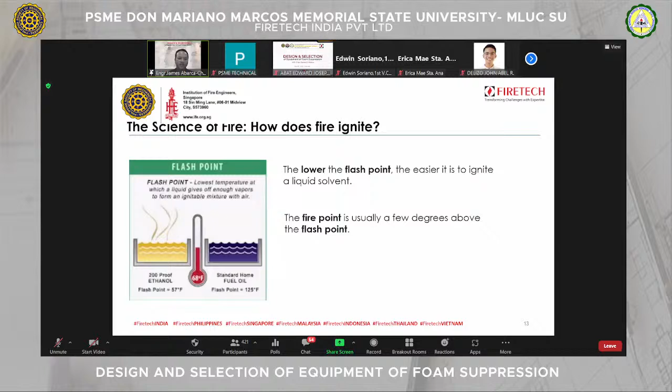Then we discuss flammable liquids. What are these flammable liquids? Hydrocarbons. You know, basic hydrocarbons are basically the same as fossil fuels. The common hydrocarbons are methane, ethane - you remember your chemistry from college, right? - propane, butane, pentane, and hexane.

These are hydrocarbons, and you can see where they're found. I tried to research this - there are top 10 petroleum companies in the Philippines. So once you graduate, you can work here.

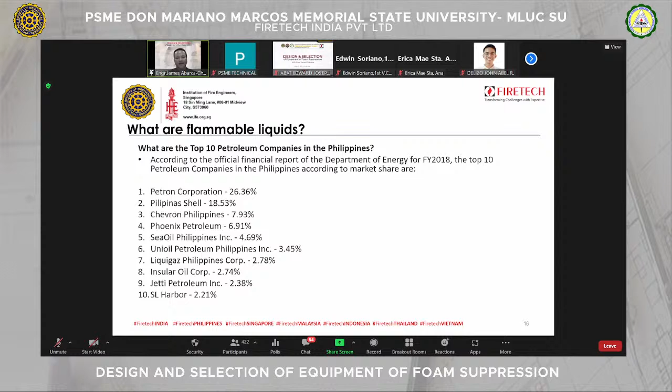Just master foam suppression and you can apply as one of their engineers. Petron, Shell, SeaOil, Phoenix, Liquigas, Insular, Jetti, and SL Harbor - these are the top petroleum companies with hydrocarbon fuel storage tanks in the Philippines that use foam suppression.

Polar solvents should also be liquid. Polar solvents dissolve other substances with a polar protic molecular structure.

Examples are acetic acid and methanol, which are used in subsectors of the chemical industry like basic chemicals, chemical products, pharmaceuticals, soap, detergent, and paints.

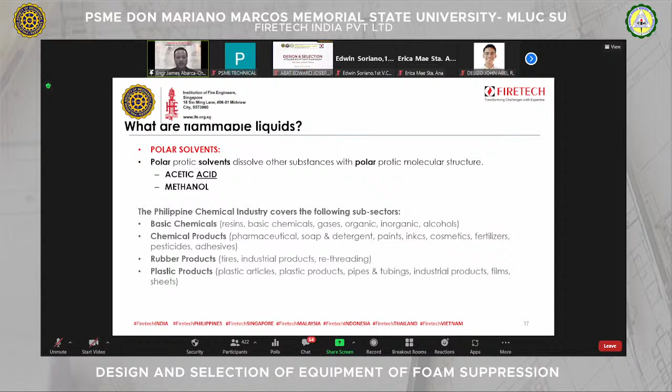And in the Philippines, they have what they call SPIK, the Samahan sa Pilipinas ng mga Industriyang Kimika. Their associations include the Philippine Association of Paint Manufacturers, Philippine Plastic Industry Association, Philippine Oleochemical Manufacturers Association, Progressive Association of Printing Ink Manufacturers, and Association of Petrochemical Manufacturers of the Philippines.

So with this, you can see the idea of what your future application, field, or job target will be, as long as you learn and master the design, selection, and installation of foam suppression systems. So from what I mentioned earlier, that's where you can go and you're welcome there.

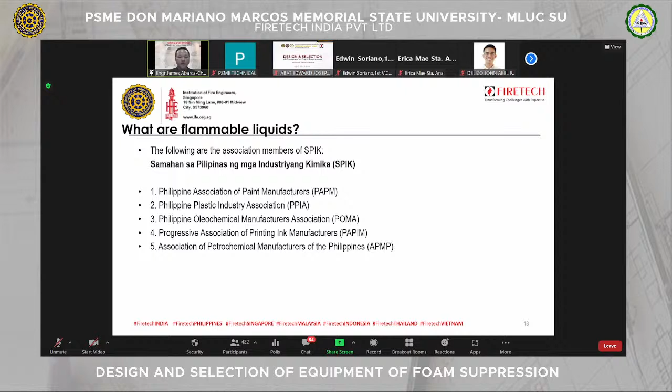Now we also learn about types of foam. We have protein foam, fluoroprotein foam, and the latest one always used now is AR-AFFF, because it's a combination of synthetic stabilizer foaming agents, fluorochemicals, and synthetic polymers designed for use with polar solvents.

The chemical makeup of this foam prevents the chemical solvents from destroying them. So this is today's modern foam.

And when we studied and compared all the types of foam concentrate, so far AR-AFFF is the most beneficial in terms of properties - knockdown, heat resistance, fuel tolerance, vapor suppression, and alcohol resistance. It's excellent in alcohol tolerance.

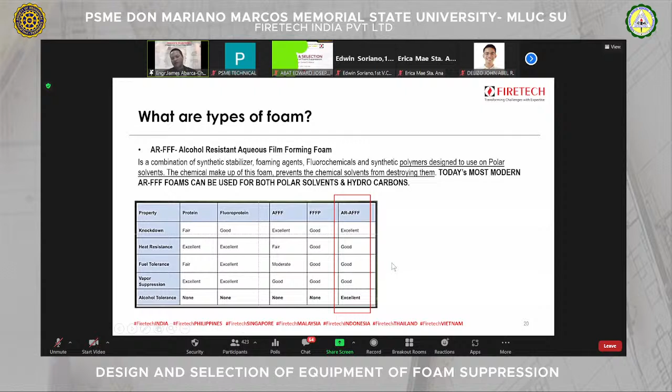So it's very much applicable to polar solvents and hydrocarbons at the same time. This figure shows that AR-AFFF is really good quality and recommended for foam suppression, because when applied to polar solvents, the solvent will destroy your foam blanket if you use other foams. But AR-AFFF will resist.

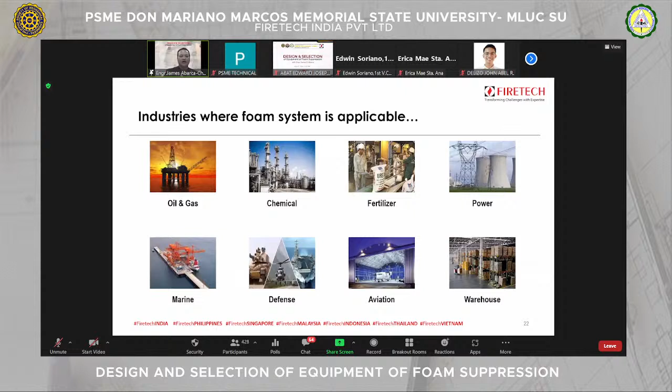Now for the products, according to code, foam suppression must always be UL listed. You saw last time how I showed you an equipment being listed.

Every 3 years, our company reports to UL staff the results of our sample foam concentrate to show that the quality is still the same as what was tested before. Otherwise, we will retest it. So it's important that it's UL listed.

You always have to tell your client that they don't need to cut costs by getting a foam concentrate made in someone's backyard in another country. I have experience with this right here in the Philippines - they tried to use that, and in the end they had double expenses because it wasn't actually foamy.

Okay, that foam concentrate - they ended up buying another one. So it should always be a UL listed product.

Now let's move on. We have two topics for design today. First topic is we're going to design and select the foam suppression equipment for a loading bay. Do you know what a loading bay is? Let me discuss what a loading bay is.

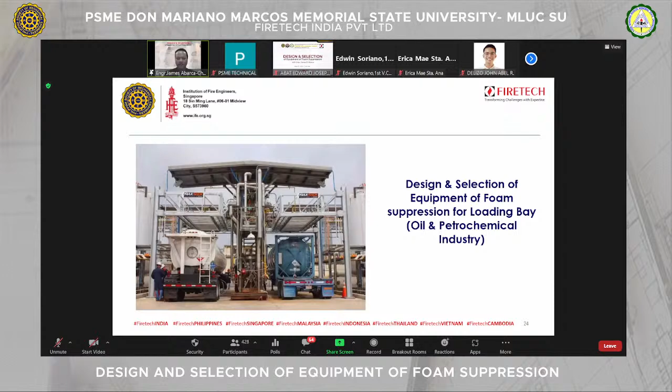Before that, let me show you a video so you get a better view. What is a loading bay? This is mostly seen in petrochemical industries - the hydrocarbon hazards I mentioned earlier. Companies like Petron and Shell have facilities like this. Okay, let's watch for a while.

Oh wait. Sorry, I have to unshare because I need to share the sound. Okay, wait. The sound wasn't shared. Okay, there.

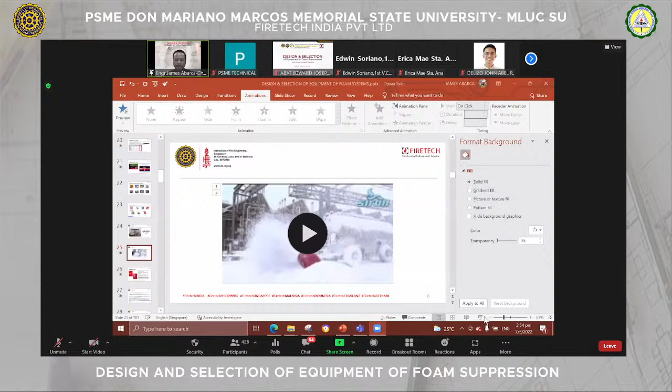Okay, so here's the video.

Okay. So, nakita niyo doon, that's a loading and unloading bay.

Okay, that's a loading and unloading bay. If you notice, there's a nozzle on top and there are also foam monitors on the side. So why is it designed that way?

I will tell you later. Tell me if I'm going too fast. Anyway, we have 4 hours, so I'll take my time so you can understand better.

In designing a foam suppression system, particularly for the loading bay, NFPA 16 and 11 are used. I hope you are familiar and aware of what NFPA is - the National Fire Protection Association of the US.

The loading and unloading of flammable combustible liquid is one of the most hazardous operations to be undertaken at any manufacturing or storage facility of hydrocarbons or polar solvents. To lessen the risk to lives and property, a quality fixed foam fire protection is needed - I'll explain what that quality fixed foam fire protection means.

Or a dry chemical is often used - that dry chemical is another topic, which I can also discuss in detail in a future technical webinar or mentorship, as long as you become active in the fire protection of PSME Technical Division.

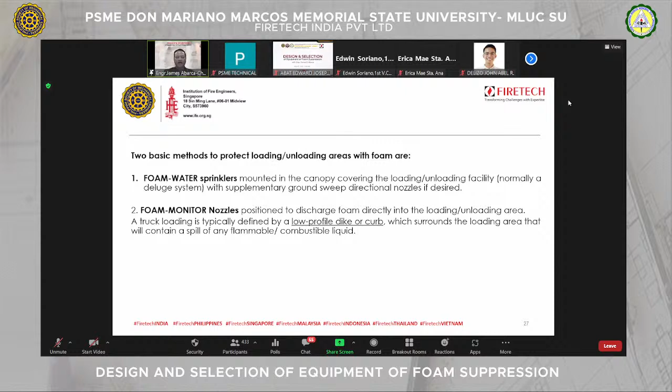And then a truck loading is typically defined by a low profile dike or curb - in Tagalog, maybe like a small perimeter wall - which surrounds the loading area that will contain a spill. So if there's a spill, this small perimeter wall accommodates it where the truck is parked.

And in many instances, tank trucks have aluminum storage tanks, and having a spill fire start underneath could cause the aluminum tank shell to weaken. The nozzles are designed to discharge foam underneath the truck to give a rapid knockdown of any fire.

Normally, 2 nozzles are used per loading and unloading bay - I'll show the positioning later. One nozzle should be located near the rear wheels of the tractor, and the other located at the rear wheels of the trailer. Both nozzles should be directed to discharge under the trailer area.

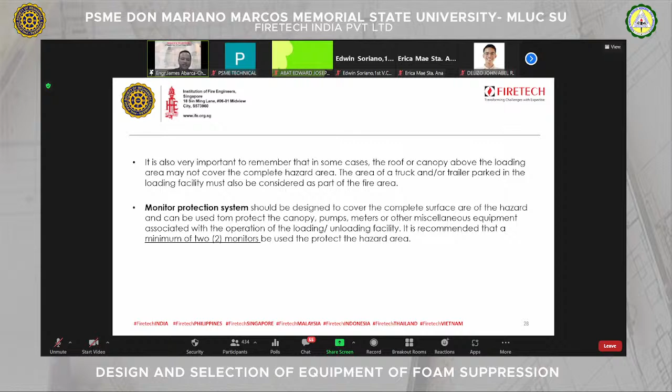Kasi yung nozzle nasa taas lang. Pag nag-discharge directly going down, what about may sunog sa left and right or other area of the truck? So yun yung gamit ni monitor, foam monitor. Okay, kasi pwede yang ilipat ang focus o ilipat ang target, ng foam monitor. Okay.

So, well, that one, I leave it to you as a research, please. I cannot explain everything today. Okay? Ano ba ang intrinsically safe detectors?

So, now, once na-detect na yan, magkakaroon na ng flow. It's either an open nozzle dito sa may canopy o kaya sprinkler head na nag-burst. Okay, but in this case, it's an open head, kaya nga may heat detector doon na nagbigay ng signal sa deluge valve. Eventually, there is a flow of foam here hanggang sa the pressure will be reduced. Yung water supply will increase kasi nag-umandar na yung pump. And it will push the water into the tank shell and the foam concentrate inside the tank.

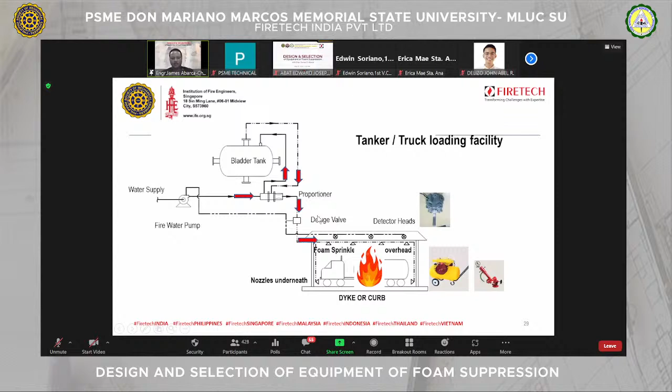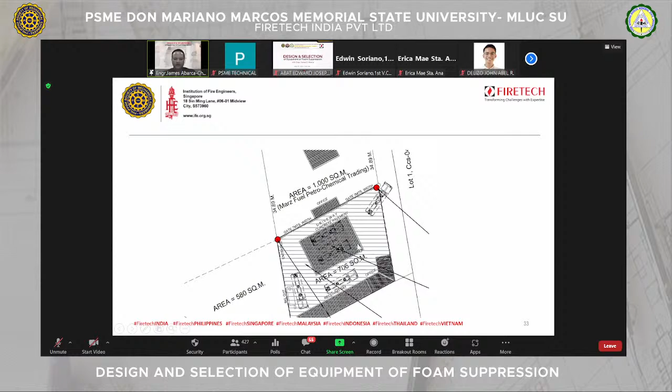Okay? Here's inside the canopy. Now let's design for that. So this is the canopy and this is the foam monitor being placed at the perimeter. Ang given ay, ang type of fuel daw na nandun ay hydrocarbon na gasoline or diesel. Ang dimension ng bay ay 10 by 2 by 7 ang height. Okay, 10 by 2 by 7 ang height.

And the requirement is to select and size up the foam suppression equipment. So they wanted to put 2 mobile foam monitors around the perimeter as explained in the code. Kailangan na merong foam monitor and foam sprinkler heads at the canopy and underneath near the tires. So to make the design very simple, better make an Excel sheet.

Doon sa Excel sheet, ganito ang magiging itsura. So ito yung area protected. Ano yung flammable liquid. Then I have 2 bays, right? It mentioned here. And the curb area is 40 kasi 10 by 2, right? Length width, 10 by 2 is 20, dalawa.

So 40. Okay? So if I were to look at this chart, yan, ang mga color blue ay mga given, no? Yun yung given, yun yung mismong sa planta. Si application rate, kukunin natin kay NFPA 16. Papakita ko kasi inyo mamaya. And then, dito sa other chart is yung application rate, again, we will take from the NFPA 16. So, from this constant, ito naman yung mga constant na magbe-base tayo kay NFPA 11.

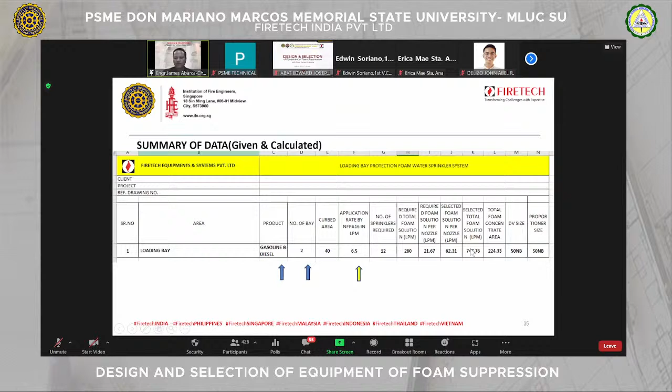So hydrocarbon. So ito yung aking mga guide, yung mga sinulatan ko. Ika-calculate natin itong foam solution rate, kung ilang unit ang foam, ito yung aking mobile foam, and ano yung size ng aking bladder tank. Same thing doon sa chart na isa mamaya. We can compute for this foam solution, and later on we can size for the foam bladder tank at yung size ng deluge valve at saka yung proportioner. Okay, so let's go.

Before we move forward to the design, kailangan meron na tayong na-download or hawak-hawak sa desktop natin yung mga data sheets ng ating gagamitin.

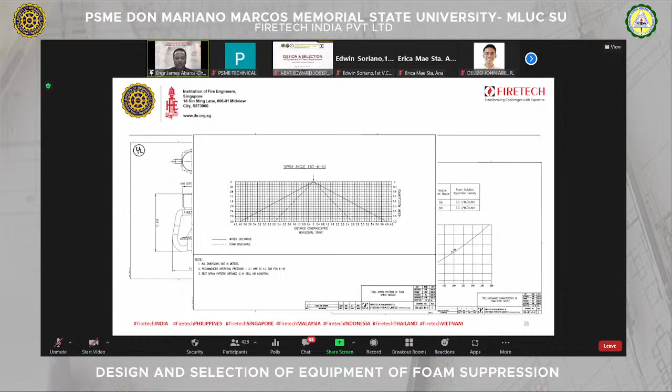Okay, so now I also have downloaded my foam monitor. So I use a watercam foam monitor with this technical data sheet. Andito yung model, importante dito si flow, ito ang very important dito, kailangan itong isa-take note natin. Of course, I use this mobile foam with a flow of 225 liter per minute.

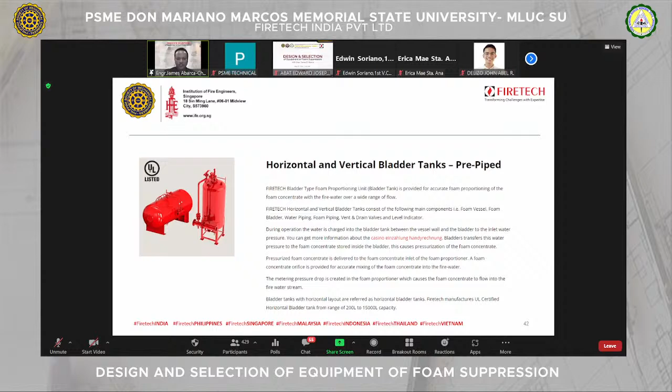Now, for my bladder tank, I use this data sheet, with the range of, I use vertical bladder tank with the range ng capacity mula 200 hanggang 2,000. So nakahanda na yung aking data sheet, nakapark muna yan.

Now, what's the methodology? Number one, identify the fuel to be protected, so in this case hydrocarbon. Number two, make sure that you already have available data sheet, nagkaroon na tayo, pinakita ko kanina.

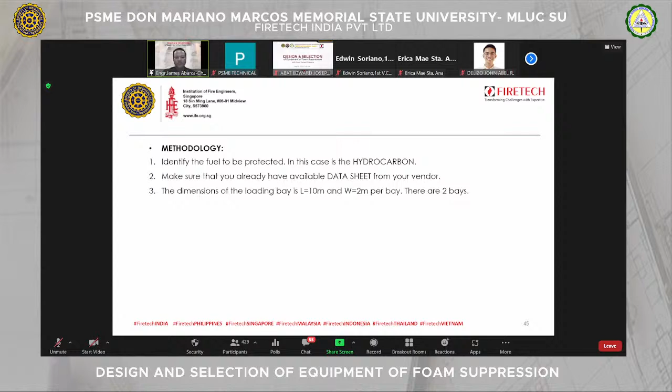Number three, the dimensions of the loading bay is 10 meter length and width 2 meter per bay, and there are 2 bays, so yun yung ating protected area, yung dalawang bay. The application rate to be used is 6.5, as per NFPA 16, yung nandun sa chart natin. Okay, we'd like to calculate for the number of foam nozzles, considering ordinary hazard 2 classification, yung nasa NFPA 13. Kapag OH2, ang spacing daw ay 3 meter, so I will use that.

So if I'm going to calculate my number of nozzles, i-divide ko lang. I have my length 10 and the space is 3, I have 3.33, of course whole number I use 4. Ang width ko is 4 and divided by 3, then 1.33, I will use 2. Laging even number, so 4 by 2 sa isang bay ay 8 plus 2, remember yung nasa ilalim, plus 2 na underneath the trucks. Therefore, sa isang bay, kailangan ko ng 10 pieces ng nozzles.

Now, ano yung required total foam solution for curb area? Ang formula is you just multiply that application rate, because what's the unit, application rate is the liter per minute per square meter of the protected area. Ang protected area ko dito ay yung 40, yung dalawang bay, right? So 6.5 multiplied by 40, I will have a total foam solution of 260 liter per minute. Yan daw yung kailangan kong foam solution na maprotektahan yung loading bay ko.

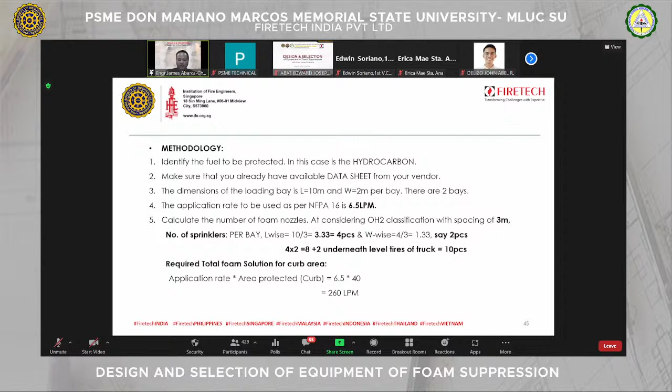Ngayon, dahil chemical plant siya, ito yung reference ko sa spacing ko, NFPA 13.

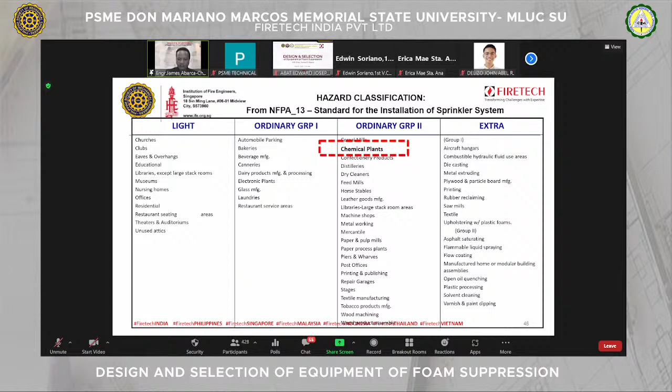Table 4.6.2, yan yung reference. Okay, na-space ko na, nabilang ko na yung nozzles ko. Therefore, I would like to know my actual flow per nozzle. Since I'm using 10 nozzles, I divide it by 10. Therefore, I have 26 liter per minute per nozzle.

Calculated yan, and based sa data sheet, ginamit yung K-factor na 43 and a pressure of 2.1 bars. Therefore, by using this formula, K is equal to Q over square root of P. Ito lagi ang formula ng K-factor, makikita rin ito even sa lahat ng catalog ng sprinkler head and nozzles.

I'm very interested to get the actual flow of the selected foam nozzle. So i-multiply ko lang siya ng square root of 2.1. Q is, i-multiply mo lang yun, cross multiplication. So I will have an actual 63 liter per minute na nozzle, which is okay kasi ang required ko lang ay 26, and ang actual flow nung napili kong nozzle ay 63. Therefore, it's more than the required, so it's safe to use.

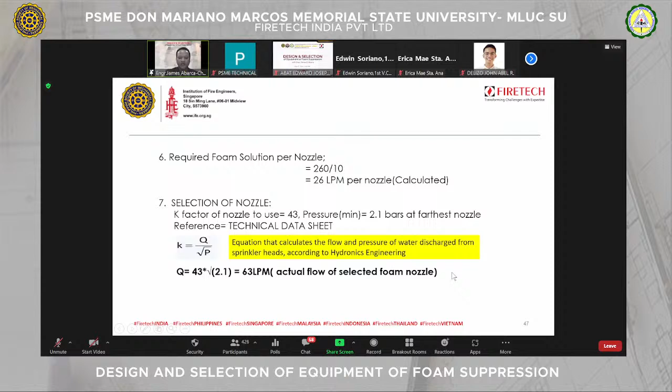By the way, itong equation na to, it is the equation that calculates the flow and pressure of water discharged from sprinkler heads according to hydronics engineering. Ito yung aking napiling nozzle with that K-factor 43, and ito na ngayon yung kanyang model.

So balik lang ako kay data sheet. Ito yung aking K-factor, I use 140 degree with this spacing at this rate. So by using this nozzle, it means it's safe for me na gamitin kasi it's over the requirement.

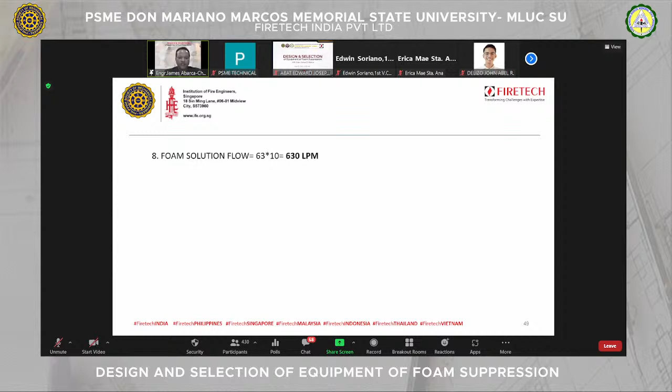So ang foam solution ko ngayon, with that 10 minutes I use for this application, is... sorry, 6,300 liters. Now, if I want to, should that be liter per minute? Liters only of foam solution.

Ngayon, solution pa lang yun, ibig sabihin may tubig at saka foam concentrate. Remember yung unang discussion natin na ang foam solution, kung ginamit ko ay 3%, 97% ang tubig, 3% ang foam concentrate. Ngayon, interested ako gaano karami ang aking foam concentrate. So 3% yung pinili ko, kaya i-multiply ko lang siya ng 0.03 with that certain duration. So I will have 189 liters.

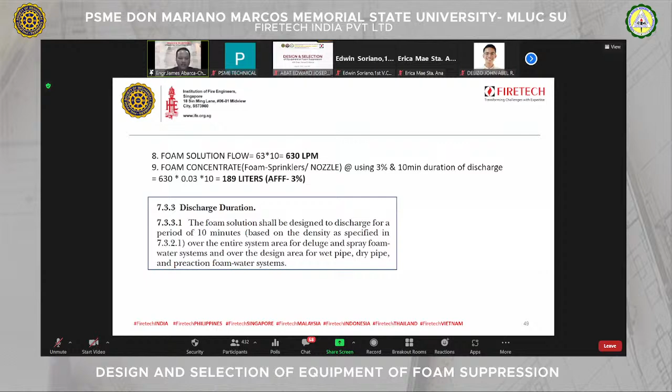So with that 189 liters, ito yung reference ng duration, okay, sa NFPA 16. With that, then I'll go to my data sheet, 189. Wala namang 189 in my equipment, ang pinakamaliit ay 200. Therefore, I will choose this because it's also more than the requirement, so it's safe for me to use. I will use 200 liters of foam bladder tank.

And with a proportioner of 80. Paano ba nakuha yung proportioner? Ito yung nagmi-mix, so balik ako sa performance data, ang basis ko ay yung foam solution ko na 630. Based ako dun sa nominal flow range. 630, and ito 200 to 320... so pwede kong gamitin si 80. 80 na foam proportioner, I think it's 80 na foam proportioner.

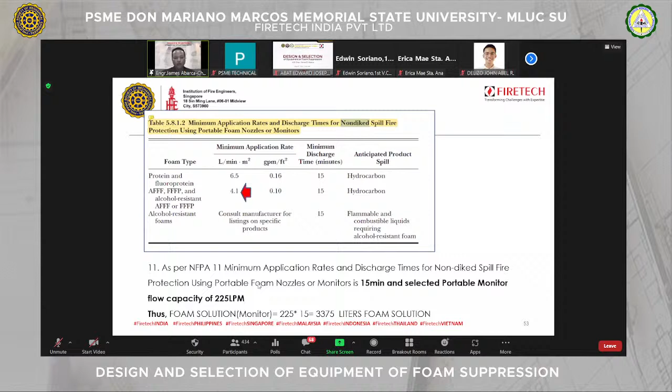Foam solution ito, may tubig at foam concentrate. Bula, in other words, pag naglaba kayo, ito yung bula. Okay, ito yung volume ng bula. Pero interesado ako sa ilang foam concentrate ba. Therefore, i-multiply ko na naman ng 3%.

But in this case, for mobile unit or yung perimeter, I have to add 10% due to losses. Laging mag-add ako dyan sa design. So, I multiply by 1.1. Therefore, the actual kailangan daw ng foam solution ko sa aking monitor ay 111.375 liters.

And if I use 200 liters, laging sabihin dalawa, right? Which is capacity ko doon, kanina, kung babalikan natin, if I will come back to that catalog, yan, I use 225 which is higher. Ito na lang kasi yung aking available equipment, so that one I will use. Okay? If you have available equipment that is lower than that, is also good.

But in my case, in this design, I use that, yung 225 na yun. Laging dalawa daw. Remember, merong clause kanina na nakasabi, laging dalawa. Magkabilaan. Yun yung requirement nitong design na to. Laging dalawa means I will use a foam portable foam monitor with 200 or 225 liters.

And my data here, this one should be 500. Sorry, this one should be 500 liter, not 400. And my summary then is, for this loading bay, kailangan ko ng.

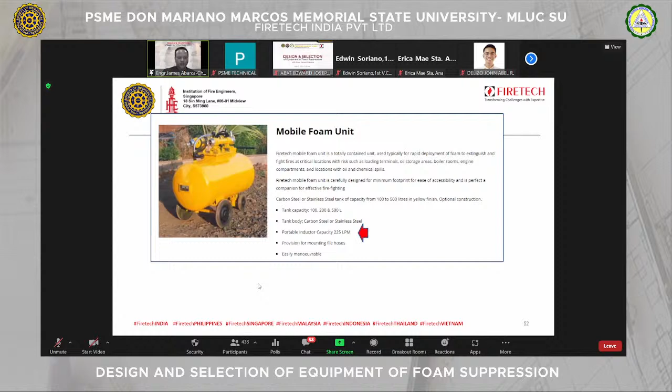10 nozzles na ang aking deluge valve ay 80. Bakit 80 yung deluge valve ko? Kasi yung na-size ko kanina, remember, balik tayo dun, no? Yung na-size ko na proportioner is 80. Kasi pagkalabas ng foam bladder, diretso na sa deluge valve.

So kapag ganon, automatic na yan, na anong size ng proportioner, yun na rin ang size ni deluge valve. So, I use 80. Then my bladder tank, which I computed, is the 200 liter. Then my proportioner is 80, and my foam concentrate is 200 liter. So bakit 200? Kasi 200 ang laman nitong tangke. Okay? If the client asks me to put a reserve, mag plus 200 ako.

Kasi nakalagay sa NFPA 11 na kapag in the event of fire, nagamit mo na yung 200, kailangan in 24 hours, i-replenish mo kaagad yung system mo into active mode. So for you to do that, kailangan may naka-standby ka lagi na another 200 foam concentrate. Okay? But sometimes client, sometimes due to, I don't know, financial reasons, ginagawa na lang next na lang ito.

Okay? But still, they have to make sure na meron kaagad naka-standby na reserve. And to have that reserve, ang storage dapat niyan, hindi siya exposed sa sun. Otherwise, it will degrade its life. Kasi ang life ng foam concentrate inside the bladder tank is roughly 10 to 20 years. But if it is exposed to the environment, especially under the sun, that life will be lessened.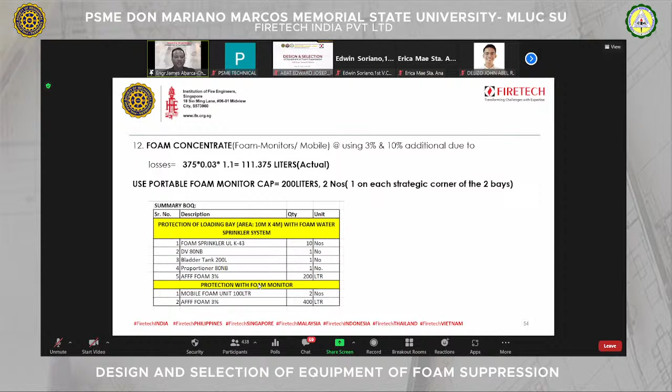The way how to do it is hydraulic calculation. Full hydraulic calculation. Sa panahon ngayon, meron ng software. Okay? It's good to have software now. Noon siguro, minamano-mano or gumagawa ng Excel. But this time, there's a lot of software available sa internet. Yung iba may bayad, yung iba libre. Okay? But for you as a student, maybe you can download those that is free para mapag-practicean ninyo.

Okay? So, yun yung ating design ng loading bay for hydrocarbon.

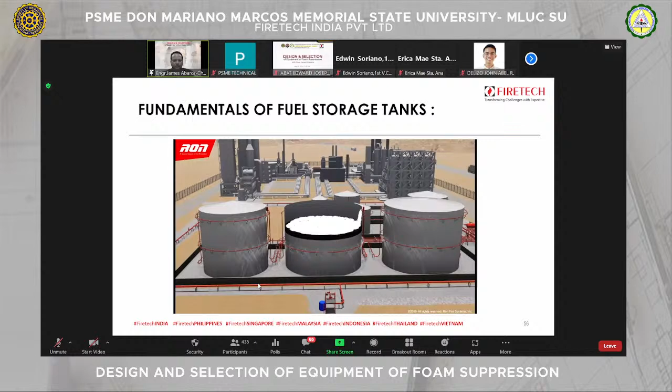Gas, no? Ito naman nag-spill na yung fire. So how to suppress that? Diyan papasok yung supplementary protection, that is the monitor.

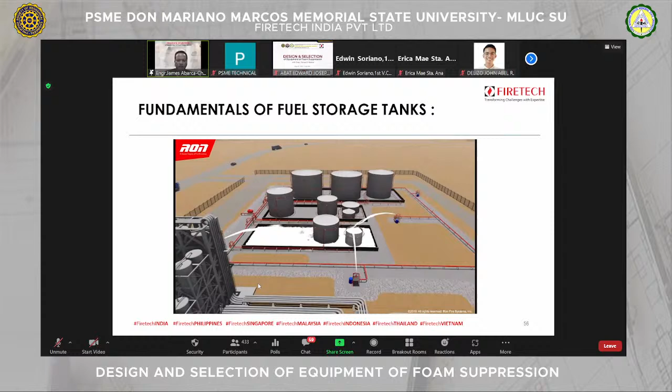Pinuno niya yung nasa loob ng dike, yung sinasabing dike wall. Okay.

So you just saw a video how a fixed roof tank, ang tawag doon ay fixed roof tank kasi meron siyang foam chamber. Later I'll tell you what is foam chamber. Suppress fire. And kapag nag-spill yung fire, merong si monitor. So yun yung isa-select natin ngayon.

Terminologies. This should be terminologies. Let's go first for terminologies again, tulad ng ginawa natin kanina sa loading bay. What is fuel storage tank?

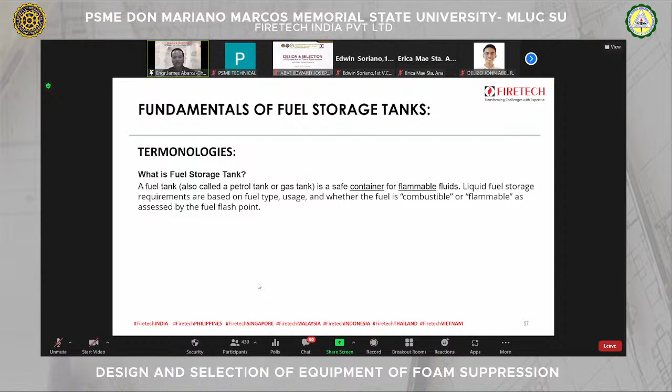Fuel storage tank, also called petrol tank or gas tank, is a safe container for flammable liquids. Okay? Fuel storage requirements are based on fuel type, usage, and whether the fuel is combustible or flammable as assessed by the fuel flash point. No? Okay, so it can also be a resin or solvent tank.

What material is used? Yung material na ginagamit, gravity, having a gravity of 40 degree API or heavier. Concrete tanks with a special lining may be used for other services provided the design is in accordance with sound engineering practice. Majority daw sa mga storage tank work under atmospheric pressure according to API 620, okay? And the maximum allowable pressure of storage is 15 PSI.

Kapag nag-exceed, considered na yan na pressure vessel. Okay? Since storage lang, kailangan ganyan lang yung pressure niya sa loob.

So this is a fixed roof tank. Fixed roof kasi cone-shaped, sarado sa taas. Fixed roof tank is a type of storage tank used to store liquids consisting of a cone or dome-shaped roof that is permanently affixed to a cylindrical shell.

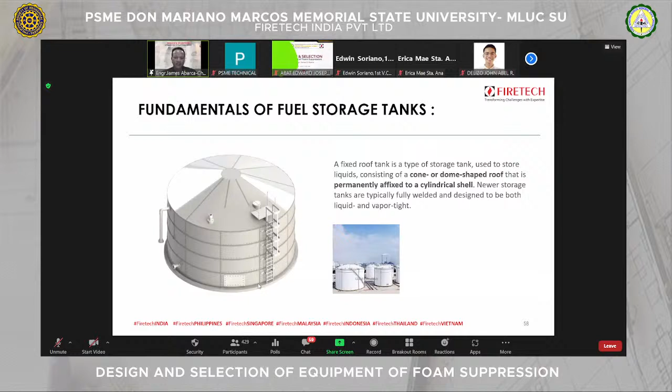So meron lang yung opening, may vent yan to the atmosphere. Okay? Newer storage tanks are typically fully welded and designed to be both liquid and vapor tight.

The roof, that's fixed roof tank. Ito naman, meron pang isa, yung floating roof. Ano ba yung floating roof? Ito, the floating roof naman

floats on a liquid stored at atmospheric pressure. It is consequently rises and falls as the level of the liquid does inside the tank. So may opening yan sa gilid, dun sa kanyang seal, sa rim seal. I'll show you later, meron ding protection yan.

Floating roof tanks are generally used to store volatile liquids to minimize the loss of stored liquid product inside the tank due to evaporation, by eliminating the free space above the stored liquid.

Kapag kasing merong void or space, nagkakaroon ng vapor, yung liquid. Tendency, nag-evaporate yon, magbabawas yung liquid. So ito talagang yung roof lumilipat, dumidikit mismo doon sa liquid para sa ganun maiwasan yung space.

Okay? Now, what kind of protection device is used for protection of fixed roof tank? So fixed roof tank is using top pouring system designed to apply foam gently. Kaya meron tayo dito yung sinasabi na foam chamber. Okay?

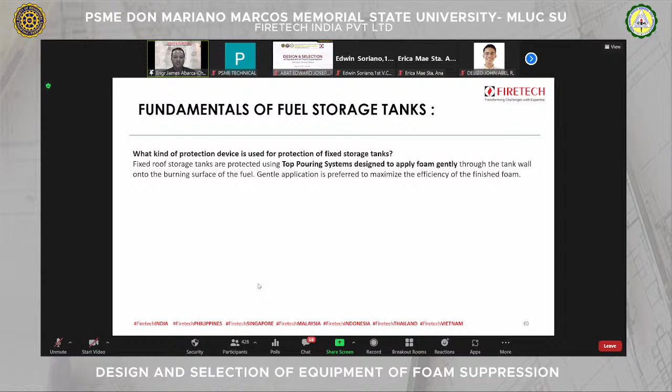Okay, ngayon naman, what is foam pourer? So itong foam pourer, it is a device through which foam is discharged gently on top of roof tanks, floating or fixed. It is generally fixed with foam maker with the help of orifice plates.

It discharges foam in such a way that the foam slides down gently into the roof area. Later I'll show you what is that. Okay, and what is rim seal?

So sa isang floating roof tank kasi, merong tinatawag na rim seal. Ito yung gap in between the perimeter ng sa taas. Rim seal fire protection system is designed to detect and extinguish fire in the rim seal area of the floating roof tank at the incipient stage.

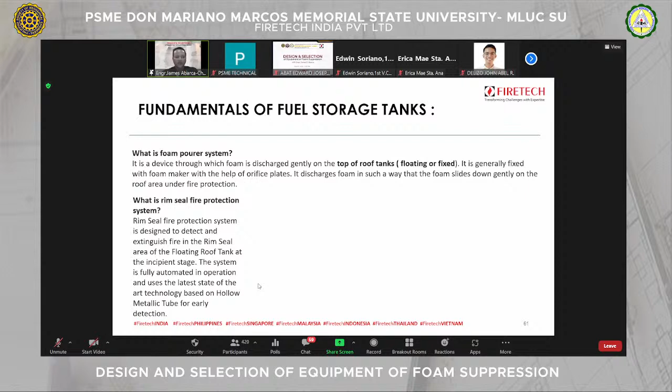The system is fully automated in operation and uses the latest state-of-the-art technology based on hollow metallic tube. Yung iba, gumagamit ng linear heat detection. There is a video for that.

ang lagi nating isipin yung flow or pressure, yung flow ng liquid going ng foam concentrate or ng foam solution going into the system should be higher, should be overcome the friction due to viscosity, which you can talk more about in other detail.

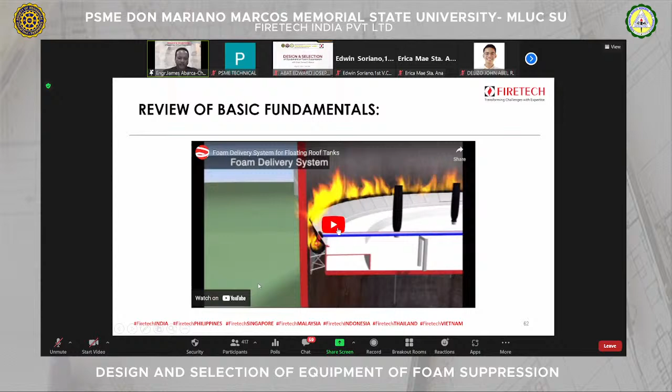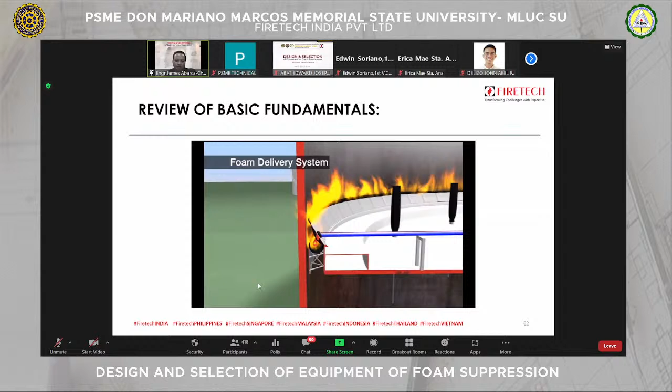In this design, there's a foam truck to pump the foam solution. The truck has water and an inductor. So the solution comes out from this nozzle to the rim seal, then it will seal the rim.

This allows the fire, which originates there, to be extinguished. It doesn't extinguish right there because the seal is just attached to the surface of the liquid. Okay, so that's how the rim seal system operates.

Now, I have just explained to you what a fixed roof tank is, how it is being protected, what a floating roof tank is, and how it is being protected. Now let's try to go to the steps on how to design foam suppression, in this example, a fixed roof tank.

First, as I said earlier, what is the fuel being stored? Very important. Later I'll show you the table I made for this project. I really identified what's inside the tanks to understand what type of foam concentrate I need to use. We need the fuel stored and its properties, particularly flash point, and the tank dimension. From there, I can identify my foam concentrate for the hazard.

Then I will identify the foam discharge method - what will I use on my tank? Is it sprinkler, foam maker, or foam chamber? In my case, for this design, I use a foam chamber. I will select a foam chamber because it's a fixed roof tank.

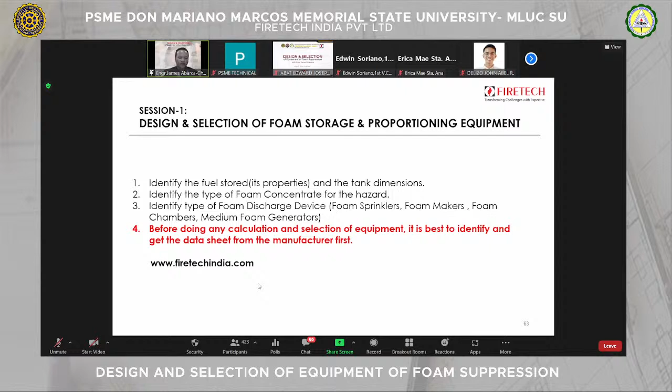Before doing any calculation, it is best to identify and get the data sheet. So find out the data sheet first, park it on your desktop. You can go to our website and download all data sheets, they're all there.

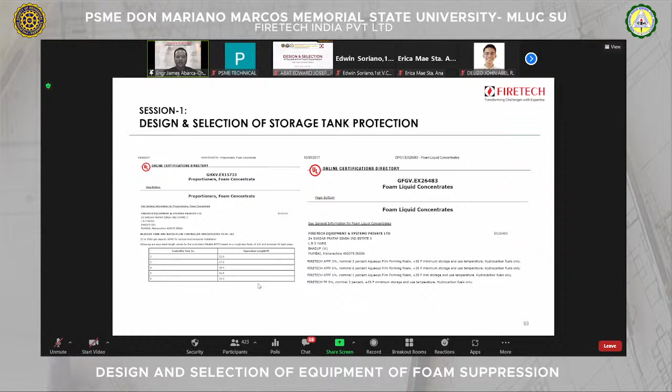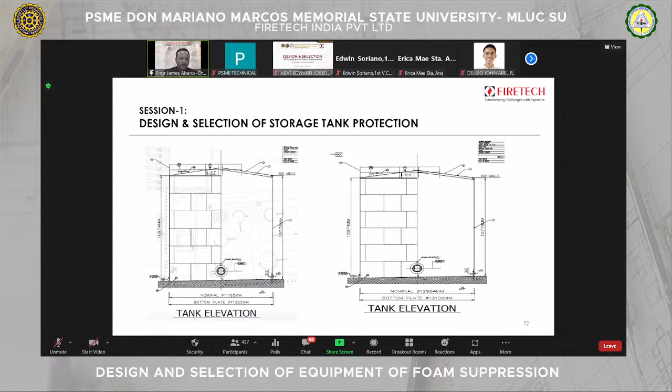This is the dimension of that tank. It has a diameter of 11.2 and a height of... where's the height? 10.7. Okay, that's its height. It's a fixed roof tank.

Now what I did, as I said, I already made an Excel file. They have so many tanks. So what I did, I asked the client, can you give me what fuels are stored in each tank? So he gave it to me. Tank 1 is isopropyl alcohol, tank 2 is acetate, tank 4 is Shellsol, up to tank 17, and it's methanol.

Then I try to identify if it's a hydrocarbon or an alcohol, a polar solvent. From there, for me to know if it's a hydrocarbon, I know what foam concentrate to use - I can use AFFF. If it's alcohol, I better use AR-AFFF as I explained earlier, remember? I don't need to use AFFF for alcohol because it will break my foam blanketing.

Now, upon inspection, I use tank 17 as it's the farthest. These are my given data. The flash point, once I know what alcohol it is, I can know the flash point. Where did I get the flash point? From Google. You can get it from Google or ask the client - they have a data sheet, most likely from the client. If there's really none, worst comes to worst, I google it.

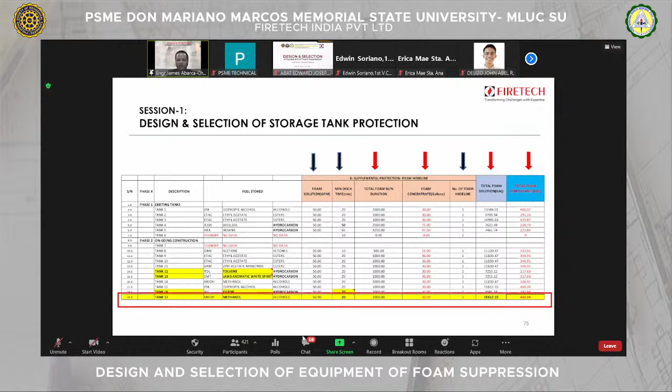Okay, let's go, first procedure. Very simple ito, very straightforward. Mukha lang overwhelming, mahirap, pero napakadali. Very kayang-kaya ng isang first year or second year college na intindihin ito.

The area of my surface is circle, so I use A is equal to pi over 4 D squared, right? Ni-calculate ko na yung flow rate, ibig sabihin, yung area times the application rate. The application rate makikita ko sa NFPA 11 in terms of GPM or liter per minute.

Now, if I'm going to calculate for my total flow, dahil nandun na yung aking total foam solution flow rate, I mean, not total flow, total foam concentrate, I have to multiply it by the duration. Ang duration, according to NFPA 11 and 16 or 13, iba-iba ang kanilang time duration application, no? NFPA 16 usually sa warehousing.

Si NFPA 30, yung paano mag-handle ng flammable liquid, depende sa anong liquid yung hina-handle. And si NFPA 13, meron naman siyang 20 minutes sa section niya na foam. Okay, but NFPA 11, siya yung muna yung reference ko ngayon.

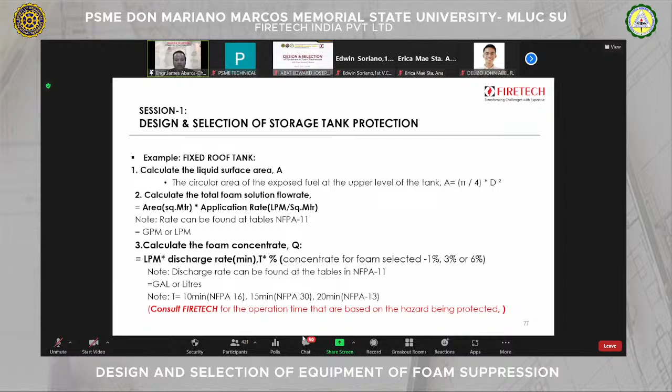Otherwise, kapag wala doon sa NFPA, lagi ang manufacturer ang i-consult natin. Kasi si manufacturer, sila na yung may direct testing sa laboratory ng kanilang products, ng kanilang foam concentrate. Okay, so better we inquire to them.

Okay, to make sure. Now, yung primary protection natin is based on diameter and height. For this case, foam chambers, siya yung ating primary protection. So, if I were to determine the application rate and discharge, I will go to table 5.2.5.2.2.

Okay, ito yung minimum discharge times at application rates for type 2 fixed foam discharge. So, on a fixed roof cone, that is containing hydrocarbon, yun yung mga condition niya. It's a fixed roof cone na mayroong hydrocarbon. Ngayon, kapag fuel mo ay hydrocarbon, that's why I categorize my Excel, remember?

Ito ang aking gagamitin, and I should know the flash point ng fuel, and I can just use this or this or this. Anyway, pare-pareho naman sila, but magkakaiba lang sa discharge time.

Kung ang gamitin ko ay crude petroleum, 55 minutes ko dapat i-consider yung discharge ng aking foam solution. Kung ang aking flash point dun sa hydrocarbon na pili ko ay 60 degrees lang, 37 until 60, 30 minutes lang ang aking discharge time. So sa pagpili ng discharge time sa condition na fixed roof tank tsaka hydrocarbon, dito sa table na ito pumunta. Okay? So then you can get this unit.

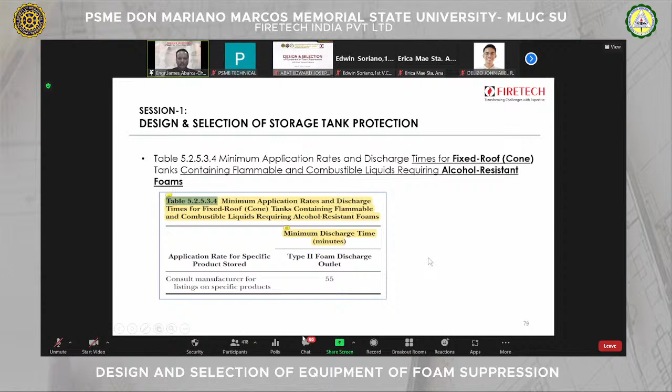Okay? So now I have determined kung hydrocarbon or polar solvent, then na-calculate, alam ko na application rate, pati discharge time.

Now, next is, ilang discharge outlet, ilang foam chamber ang ilalagay ko. So, based on this table again, okay, alamin mo lang, from this nakalagay dito, for fixed roof tanks containing hydrocarbon, all flammable liquids requiring alcohol resistant. Alamin ko lang yung diameter ng tangke ko. From there, malalaman ko na kung 1, 2, hanggang 6. Take note of the bottom corner, +1 outlet for each additional 465 square meter. So yung tangke mo, palaki ng palaki, na mayroong additional 5,000 square feet ang area, magdagdag ka lang ng isa pang foam chamber. Okay? Then, you can calculate kung ilang foam chamber ka na.

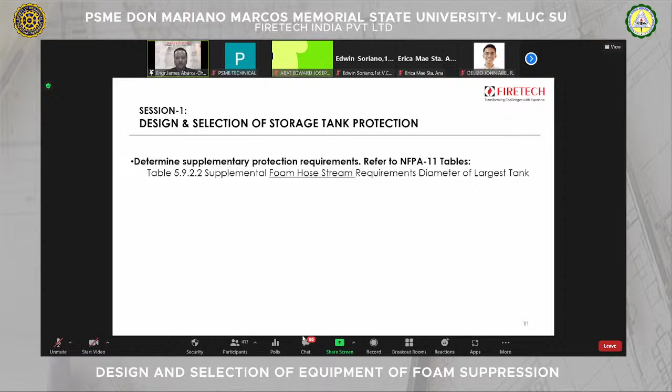Now, I've just calculated my primary protection. Yung foam chamber ko, nalaman ko ano yung foam, pati foam concentrate solution, at pati kung ilang foam chamber. Ngayon naman, doon ako kay supplemental. Ibig sabihin, yung foam hose stream. Okay? Below my tank. For spill fires.

How can I do that? How can I decide? I'll just go to this table, 5.9.2.2. Alamin ko na naman uli, what's the diameter of my tank? You can see from here, if I have up to 19.5 meter, I only use 1. Over 36, 3. So, kahit dumami pa ito, lumaki pa, hanggang 3 na yung pinakamaraming foam hose line niya or monitor around the tank. Kahit over 36 meter pa. Minsan may nagtanong sa akin yan, what if lumaki pa? Then I said, okay, look at these charts, 3 lang talaga. Ang mangyayari nga lang dyan, magde-decide ka lang ng GPM ng foam monitor mo if you wanted to upsize it.

Okay, then, if I were to determine yung supplementary, ito yung sinasabi ko kaninang clause na kailangan nating tandaan. Sinasabi dito, the equipment for producing each foam stream shall have application rate of 189 liter per minute or 50 GPM. Ito yung nakita niyo sa Excel file ko kanina na i-fix ko na sa 50 GPM with the minimum number of hose stream shown in table 5.9.2.2. So yan yung laging basis. Additional foam producing materials shall be provided to allow operation of the hose stream equipment simultaneously with tank foam installations as specified in 5.9.2.4. So ito naman yung magiging duration niya.

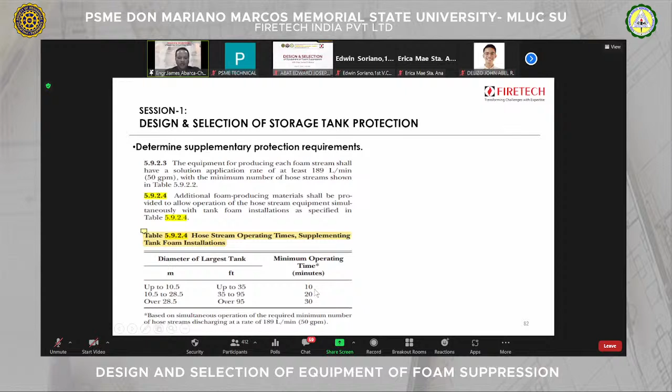Okay? So alamin ko lang yung tank diameter and then malalaman kung gaano katagal, yung i-multiply ko lang yung 50 times 10 kung hanggang 10.5 lang yung tangke. Okay? So that's my foam solution. Now, nadoble ito, no? Nadoble. Now, let's go to the actual calculation na.

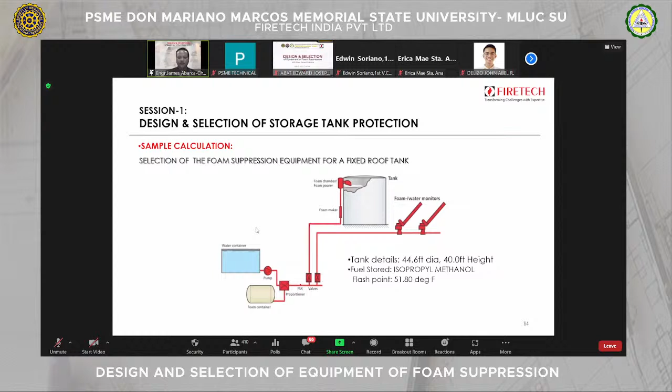Okay? So, I just showed to you kung ano yung mga table na pupuntahan kapag nagsiselect. Let's go to the actual problem. So, ang tangke ko ay isopropyl methanol ang laman na mayroong flash point na 51.8 degree with a diameter of 44.6 and 40 feet yung kanyang height.

Now, I will calculate for the primary protection, which is the foam chamber. First, I know the diameter, so I can calculate for the area, right? And the fuel stored ay methanol, so punta ako sa 5.2.5.3.4. Tinanong ko si manufacturer, sabi ni manufacturer 0.17 per square feet ang iyong application rate based on fire test data ng manufacturer. So I use that. I get the area and I multiplied by the application rate. Then I have my flow, total flow of 265.

Now I will calculate for the number of my foam chamber. Sabi kanina kay 5.2.5.2.1, I will again refer to the diameter of my tank. Therefore, since my tank is 44.6 na nakalagay sa table, dapat up to 80 isa lang. So I will use only one foam chamber. Okay? Then I'll go to my data sheet.

Ang aking flow ay 265.68 GPM. Punta ako dito sa table lang. Ang ginamit ko ay FCD inlet 100. Ayun, dito siya, dahil ang kanyang flow ay 265. So nag-refer ako sa kanyang flow range. Okay, here's my flow range. I referred to my flow range here, okay, 265 means within this area. Sorry. Flow range 190 to 750. Ayun, doon ako nag-refer sa GPM. So that's why I use this.

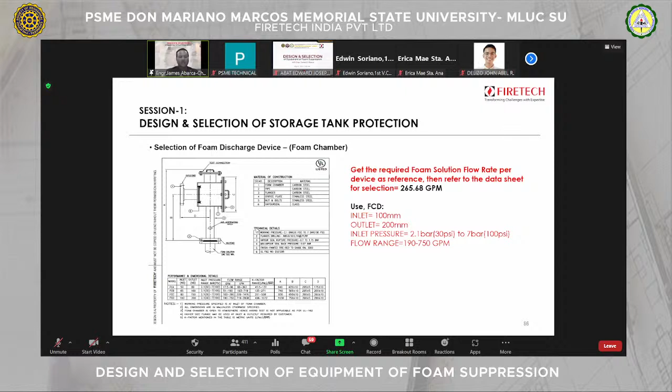Inlet pressure ko is 2.1 as mentioned here, somewhere there. And up to 7 bar. And ang flow range ko is 190 to 750. That's why I use this. I selected this in my foam chamber. Andali di ba? As long as you calculated your foam solution, yun na yung basis ninyong foam chamber. So I have selected my foam chamber, isa na ganun ng size. Ngayon naman, foam bladder tank. Okay?

I have to calculate for my foam bladder tank. But how long do I need to discharge the foam solution? Based on this table, 55 minutes. So, 55 minutes, then I calculated that, 265 multiplied by 55, so I have 14,612.

And I computed already for the foam concentrate, meaning I multiply this by 3%. There, 3%. Therefore, what I calculated is 438.36 gallons of foam concentrate, because that's my basis later on to size for my foam bladder tank.

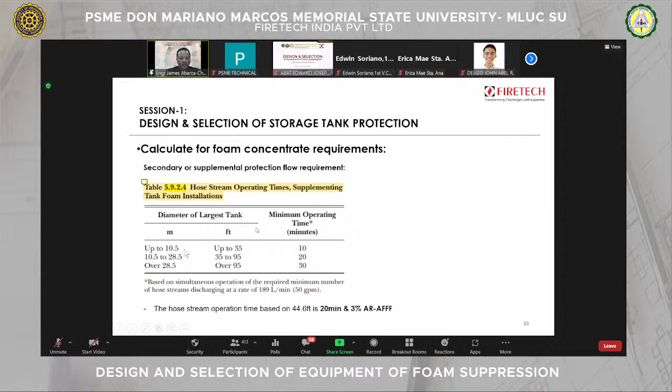Then, how long? So for this one, my tank is saying 44.6, which is within this range. So I use 20 minutes, using 3%.

Now, my secondary, if I'm going to calculate 50 times 20, only 30 gallons is needed for foam concentrate. Therefore, my foam concentrate from earlier, okay, let me come back to that. For how much? 438, I'll just add what I need here. Therefore, I have 468 gallons.

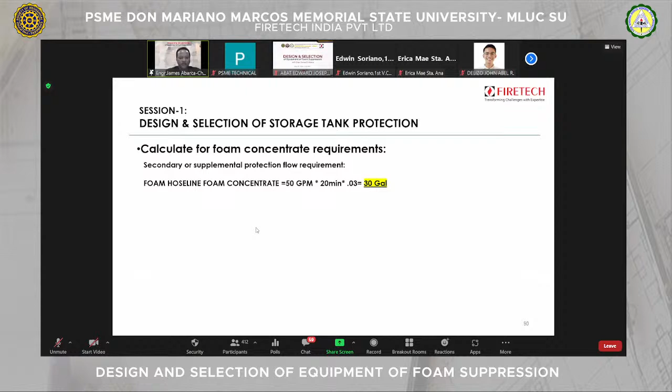Now, if I'm going to select my bladder tank, like what we did earlier with the loading bay, the basis is my foam solution. What's my foam solution here? This one, 468, I've identified. So, based on this data sheet, my 468 falls under this 528 gallons, which is 2,000 liters.

So I chose the higher one because 462 is the next. So I chose the next higher to accommodate my requirement. Therefore, my foam bladder tank size is 528 gallons or 2,000 liters.

And to choose for the foam proportioner, I use my chamber solution, the foam chamber plus the hose line, I just added them. Then that will be my basis to go for the flow range, which falls under here, 315. Then I can use my foam proportioner of 80.

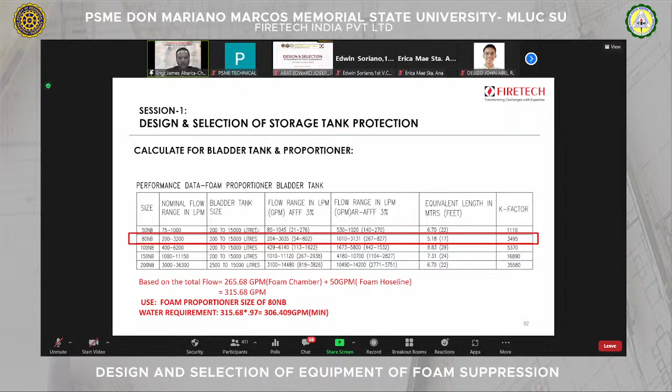Okay, a tank farm needs a fire alarm and detection system. It has to be a remote activation panel, and at the same time, there's always a provision for manual activation. That's another selection actually, but I will not touch that now.

So this is the design I made for my requirement for a foam system in my storage tank farm, the most demanding tank I showed earlier. And that is the one I'm going to ask for a quotation. Okay, so that's it. I have already selected my equipment, the sizes, and the quantity. So, next is what?

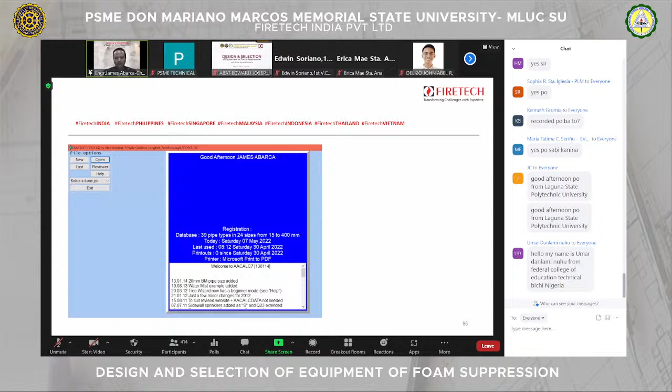Hydraulic calculations. I'm not going to go through the detail, but I'll just give you an idea how the hydraulic calculations work. So in hydraulic calculation, we check our pipe sizes.

If it satisfies the water requirement, and of course once you size that and run it, it will give you a result of the size needed for the pump, the water requirement of the pump.

So in calculating for the tank farm, we have water requirement for foam and water requirement for spray, which we can get right away from the calculation. Over at the loading bay earlier, it's the same thing, but for the tank farm, there are two sources: the foam system and the spray, the cooling of the tank.

I didn't show this earlier, but the way to do it for water spray is simple. You just get how many nozzles, meaning you get the diameter divided by 3 for the spacing, and you'll know how many nozzles in one layer. It's always 2 layers.

And then from there, you can check the catalog. It has the flow of the nozzle, just multiply by how many number of nozzles, and then you can have a rough estimate of water demand. Okay, now, going back to this hydraulic calculation, this is the software I use.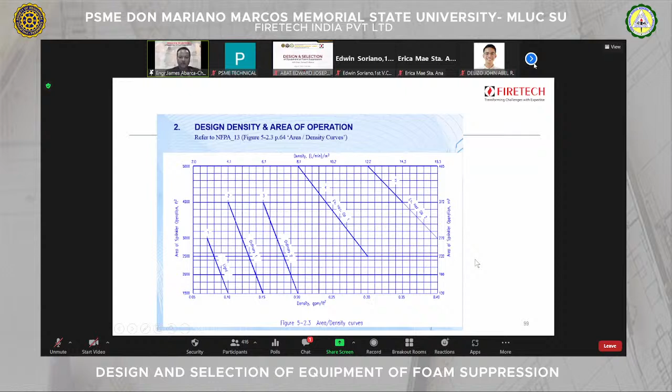Now, if you input all this - by the way, the discharge density you see here is from NFPA 13, in this figure. For light hazard or ordinary hazard, you'll know what your discharge density is, what the design density of your system is in NFPA 13. So going back to that, this is now our input for the project.

It's a high hazard, and the design area is 140, then the area of operation and the maximum area per head, we input that there. And then when we run the software, it gives us this. So the design density we placed, 12, was maintained when we input it. That means our pipe sizes are correct based on the minimum and maximum we input.

And then in this software, you have to manually input all this. For example, what's the length north, like that. Length east, east is right, yeah. Length south, length east, that's how you always input the direction.

There's a part of this software where you have to put all this - east, west, south, the direction - and it will automatically lay it out for you like this. So this is the 3D layout from our software calculation.

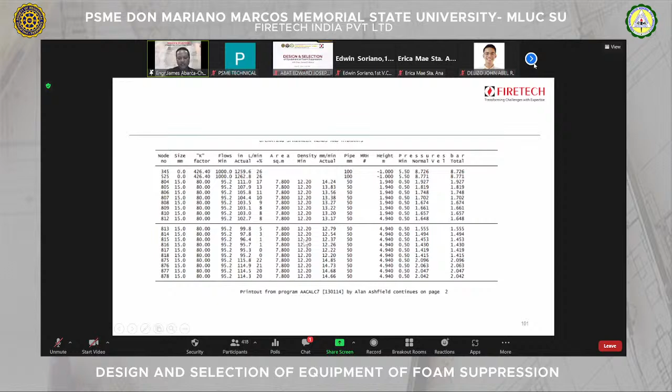That's for the pipe sizes, the flow, and the pressure. So with the software, it's easier because you just input the hazard, the maximum minimum sizes, the protected area, and then layout your pipe sizes. If something shows red here in the density, or shows zero, that means your sizing is wrong.

So you have to redo it. Change your sizing there. Change your sizing here. Somewhere you have to change the sizing. So that's the idea. I will not do an example of it now because it will take too much of our time. Maybe another time we can do it.

Let's take one example using my software. So we just calculated and designed for a loading bay. We selected equipment for a tank farm. So we made two now, one for hydrocarbon and one for polar solvent. So always remember, when you do selection for foam suppression systems, you should be guided by the NFPA standards.

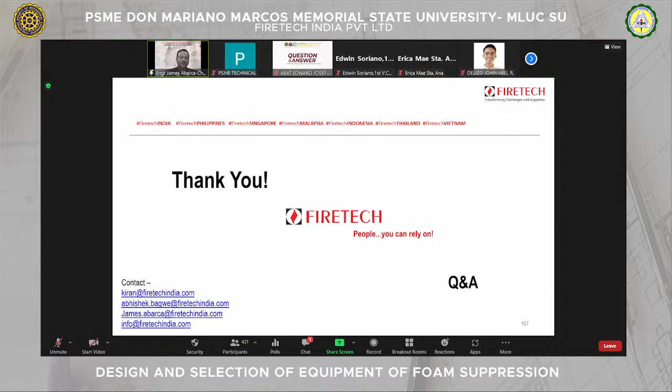So, well, I guess that's all for our presentation for today. I do hope that we have learned something. If there are questions, let's try to answer them. Otherwise, I'll answer through email what the correct answer should be. So, thank you very much. Let's go back to our MC and moderator. Thank you.